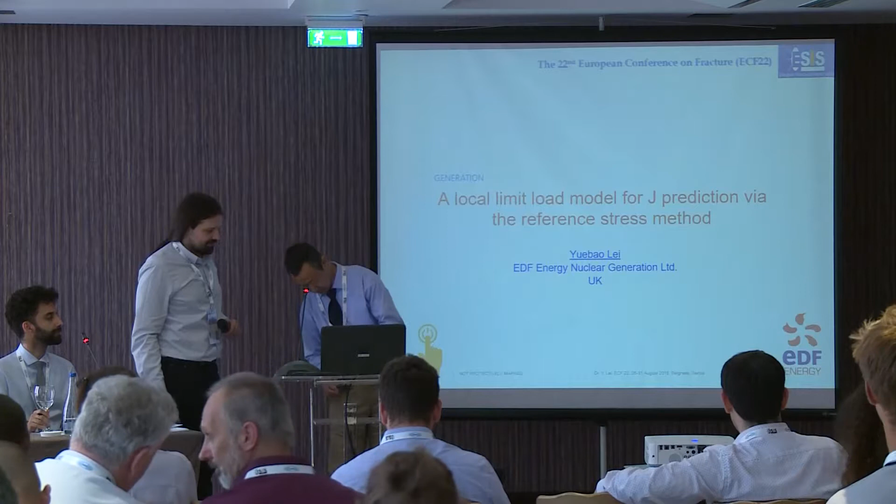Good afternoon, Chairman and ladies and gentlemen. My name is Yuebao Lei from EDF Energy UK. My topic for this presentation is a local limit load model for J prediction using the reference stress method.

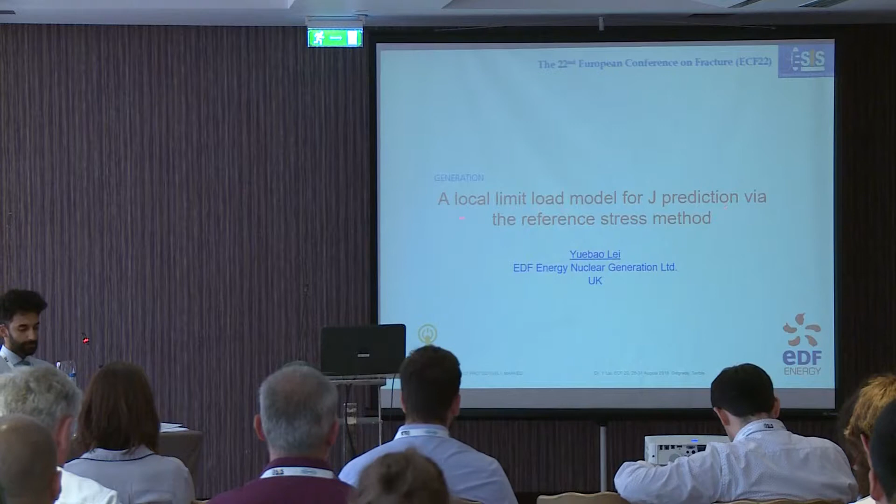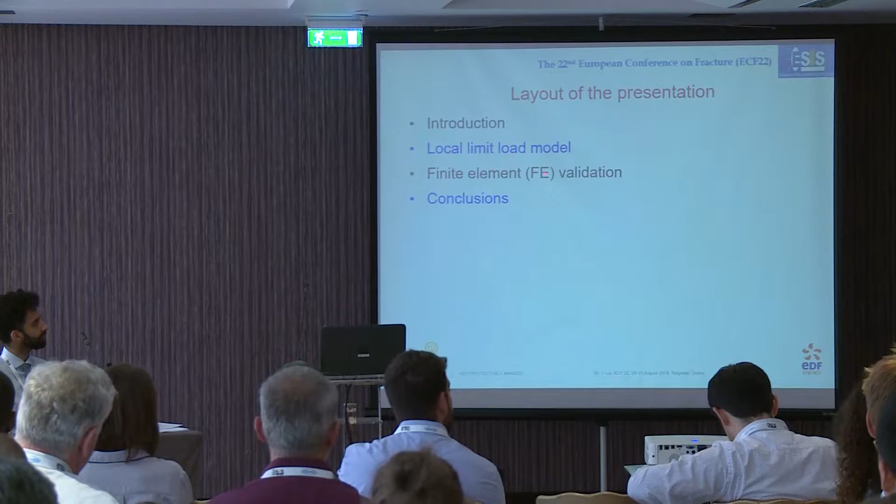First, I'll give an introduction, trying to give the relationship between structure integrity assessment, J prediction, and limit load. Then I'll answer the question why we have done that, give the local limit load model, show some finite element validation, and then conclude.

EDF Energy is the UK's largest electricity generator. Our nuclear power generation generates about 20% of the electricity for England, Scotland, and Wales. We operate 15 reactors, with 14 advanced gas-cooled reactors, that's very high temperature, and 1 PWR. This is quite normal as others.

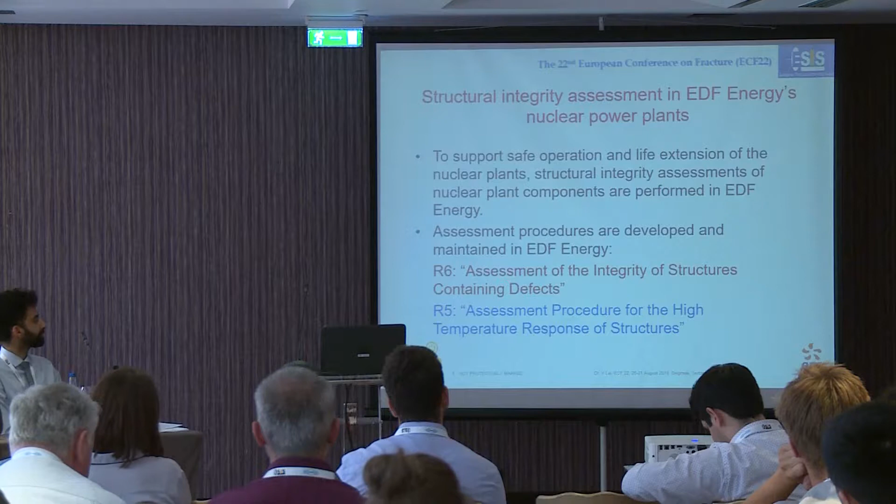EDF Energy performs structure integrity assessment to support our power station's safe operation and life extension of the plant. For this reason, we develop and maintain structure assessment procedures. One, I believe, is very famous, R6, the assessment of the integrity of structures containing defects. Another one is for high temperature assessment procedure for high temperature response of structure. The limit load I'm talking about relates to these procedures, but today I only talk about R6, not the high temperature measure.

In R6 fracture assessment, we use the failure assessment diagram method, FAD. This FAD is J based. In this assessment, we need an assessment curve and to define two parameters, KR and LR.

Another one is LR. This is the primary load applied, divided by the limit load corresponding to that.

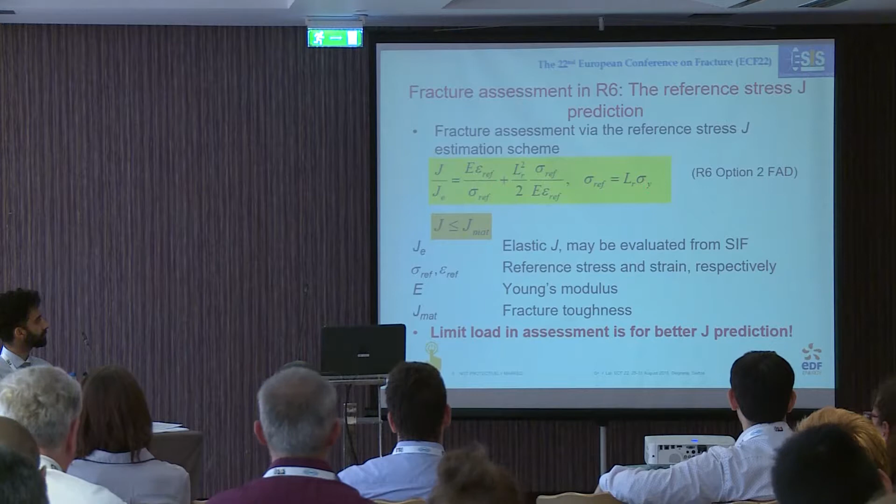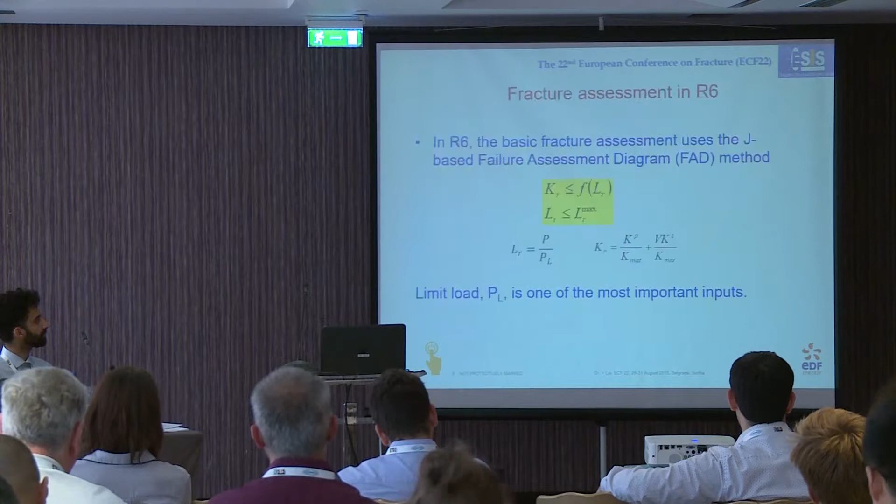Then LR is the same as we just saw, divided by LR equals the reference stress over sigma Y. That's exactly the same as this one, just produced in a different way. This is another, more general way to show the reference stress method behind R6.

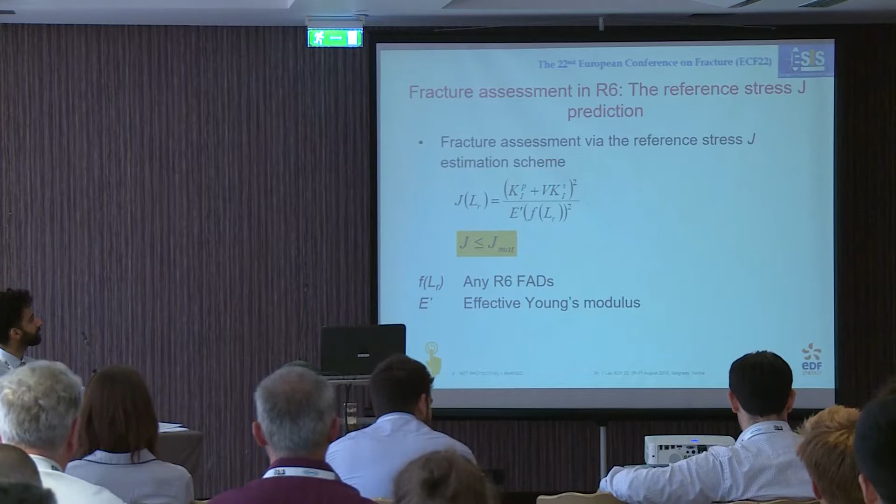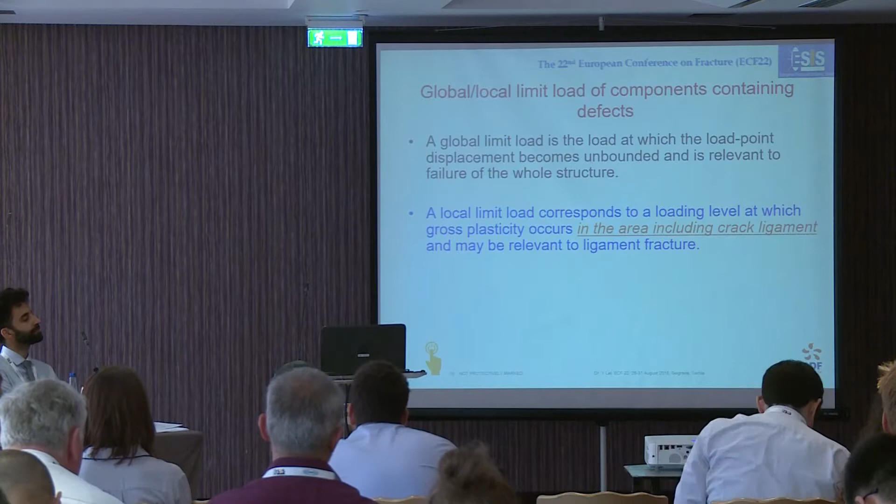I'm not going to talk about that now, but we know the limit load is a very important parameter affecting your fracture assessment. Many people think limit load is about plastic collapse, but in R6 fracture assessment, limit load is a parameter primarily used to more accurately and conservatively predict J growth, rather than plastic collapse. Many references talk about reference load rather than limit load, but I'd rather use limit load because reference load normally gives you one solution, but limit load we have many solutions to use.

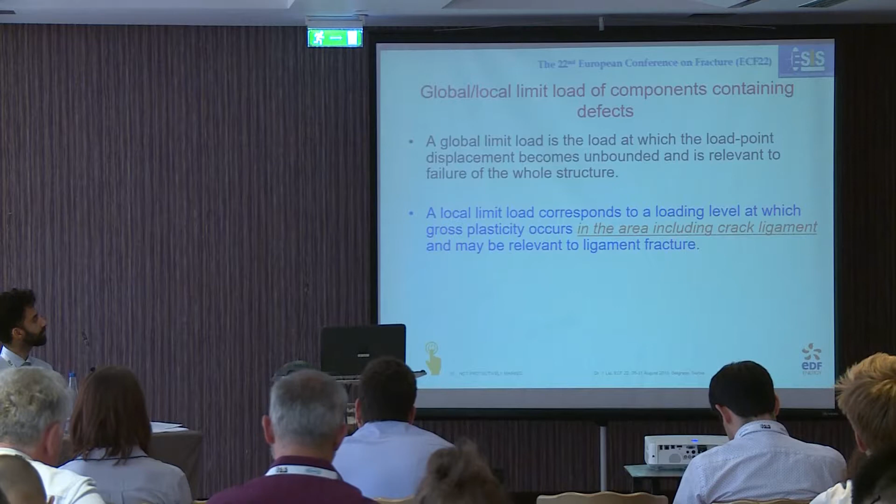For limit load used in R6, we have global limit load or local limit load. The global limit load is a load level corresponding to the load line displacement becoming unbounded. The local limit load only considers yielding, not plastic collapse, around the defect.

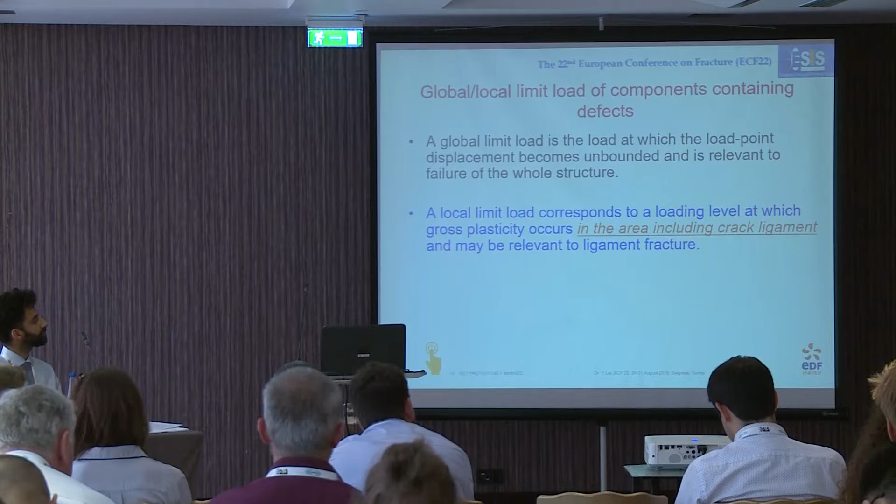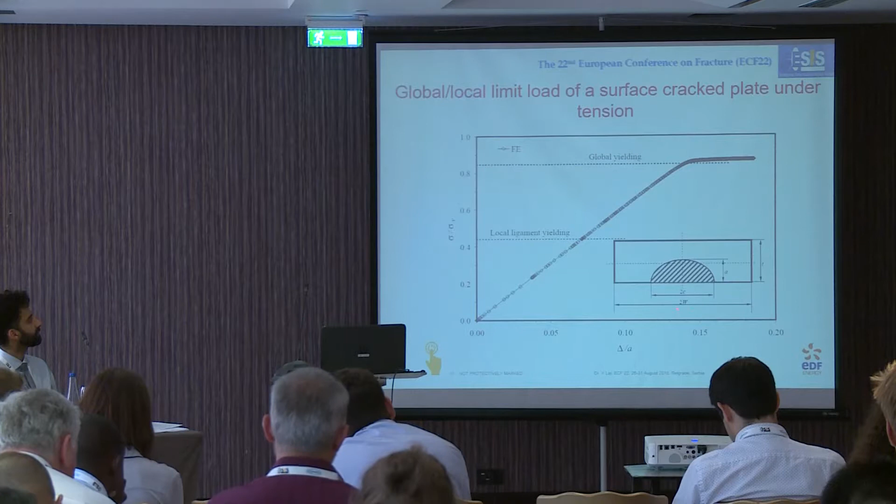So when in assessment, we need to provide limit load solutions to users. For simple geometries, it's quite easy to create global limit load solutions - we have some solutions in R6. But for very complex structures, providing global limit load solutions is almost impossible.

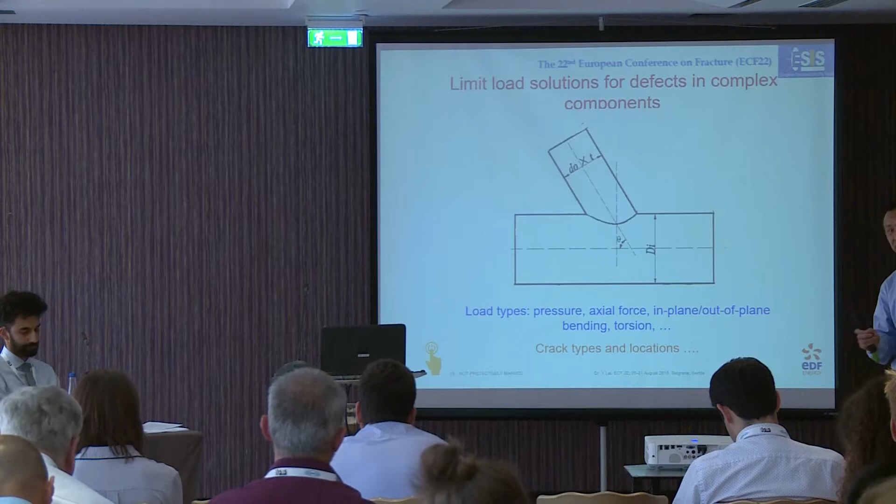So for this case, the developed local limit load solution will be a good solution, because we only consider stress information locally at the crack location, without load types. But for this case, we need elastic-plastic FE J to validate the method.

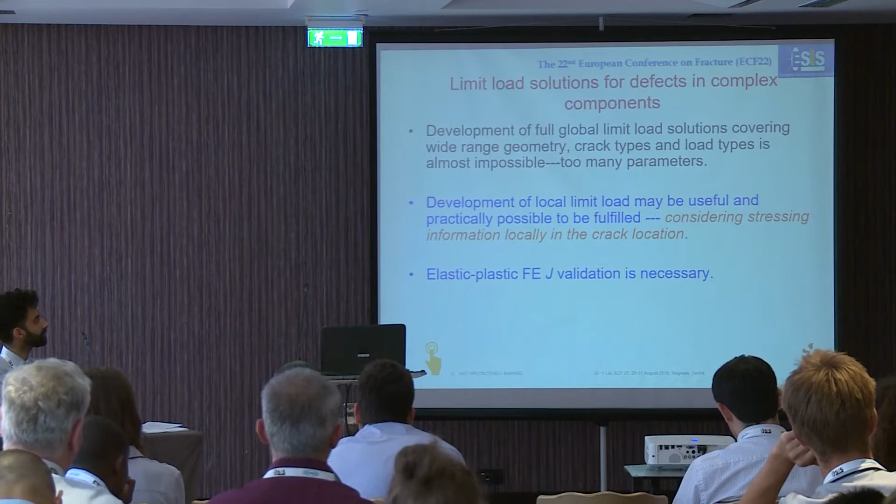So the aim of this work is to develop a local limit load model for local limit load calculations used in structural integrity assessment, and also create guidance in R6 section 2.4 for people to use, how to use it.

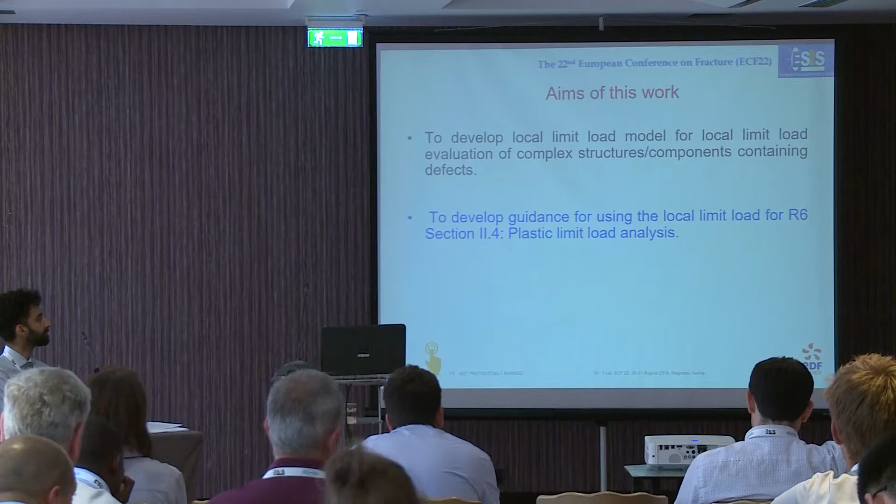Now we know the limit load and the geometrical relationship. So the next step is very easy. I describe the local limit load model I gave. My model is like that.

If you have a surface crack of depth A and length C at any location, then you create a plate with a crack size - a rectangular crack surrounding this crack. This plate has thickness the same as the real structure, but the length is just artificial, quite long, not the same as the geometry of the local structure.

Then you need to define the width. The width is defined based on C, the crack length - this is very different from other solutions, they use T. It's also weakly related to a over T, the crack depth, and K is a geometry factor that can be calibrated and recommended.

Then you need to do elastic stress analysis, uncracked analysis, to determine the stress state at this point. So what do you need to do? Check the membrane stress and bending stress, then the parallel stress - parallel to the crack - so you have a membrane stress 2m, sigma 2m, and maybe some shear stress.

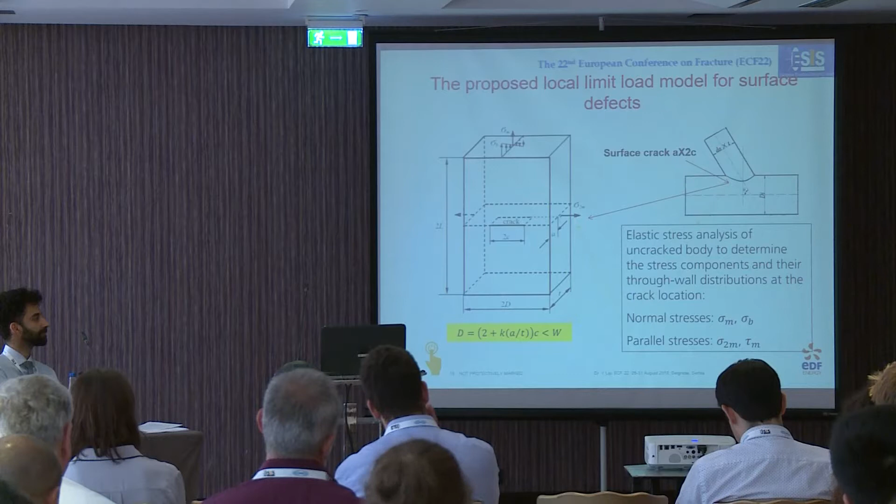Then you ask how to calculate the limit load for this plate. Without shear stress, we can calculate the reference stress - here reference stress and limit load are the same thing. So for convenience, we represent reference stress.

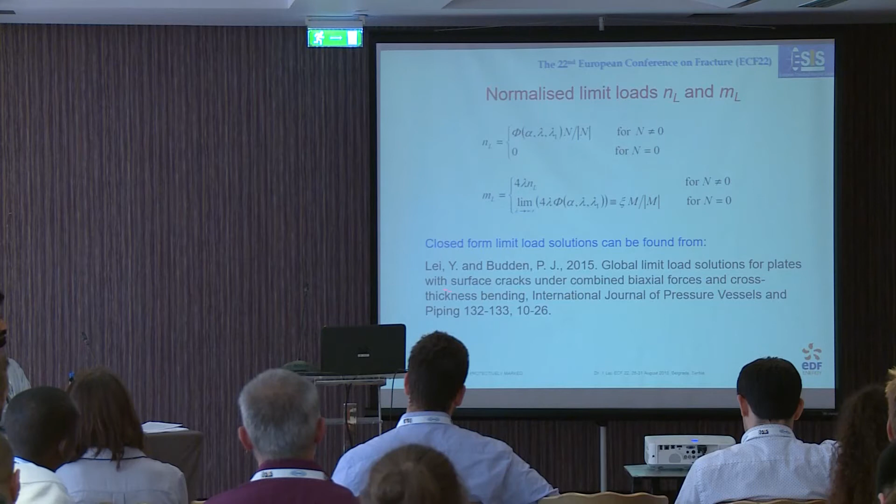So think about sigma ref - n_L is normalized limit load for tension. This has been developed and published in this paper, so it's an available solution - we just use that solution here.

If you have a shear stress, then you can correct the shear stress into this total. Then use this sigma ref to define the L_r, which can then be used in assessment. This is the full story.

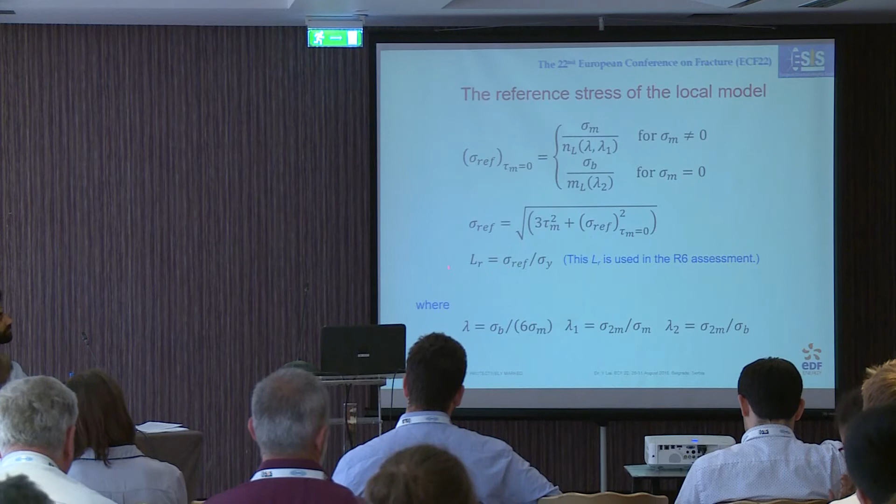But not quite - this is defined from the global limit load of a plate, but it's used as the local limit load of the structure.

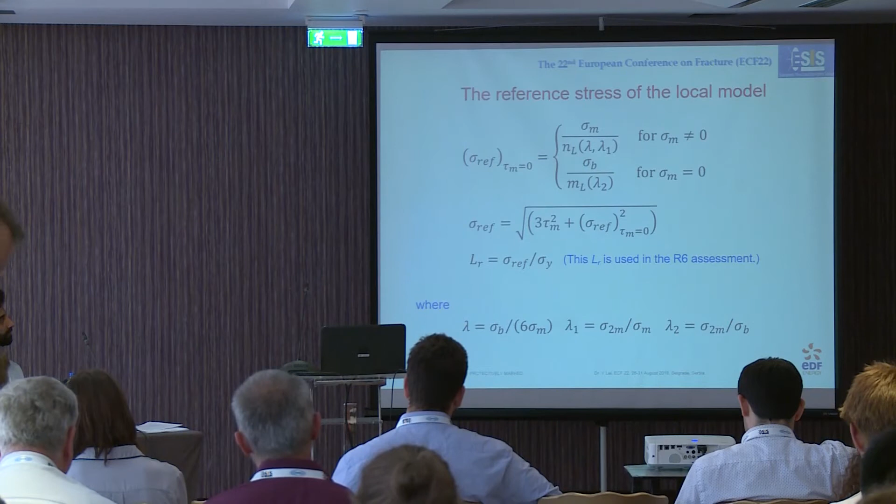Now let's show some finite element validation. Because our aim is to predict J, we use finite element J results, then use this local limit load reference stress to predict J. We compare this predicted J with FE J. The idea is very simple - just compare to see if you are conservative, and how much conservatism there is.

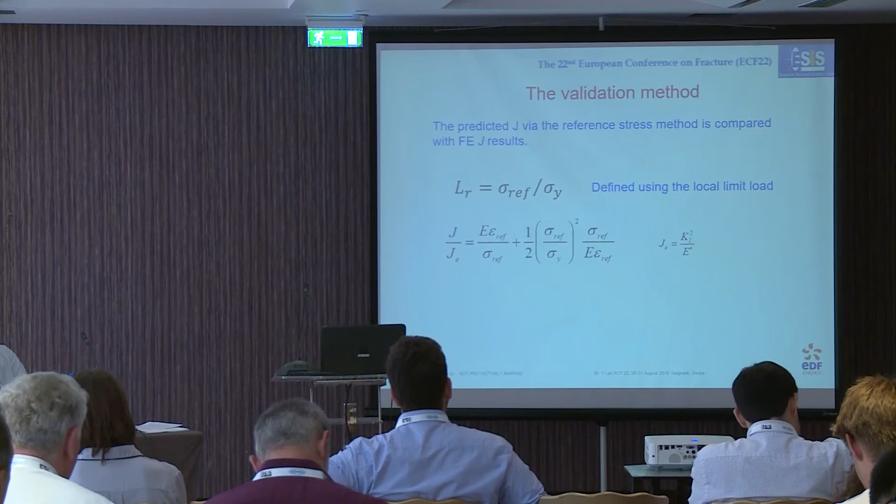I collected about 273 cases for plates with semi-elliptical cracks.

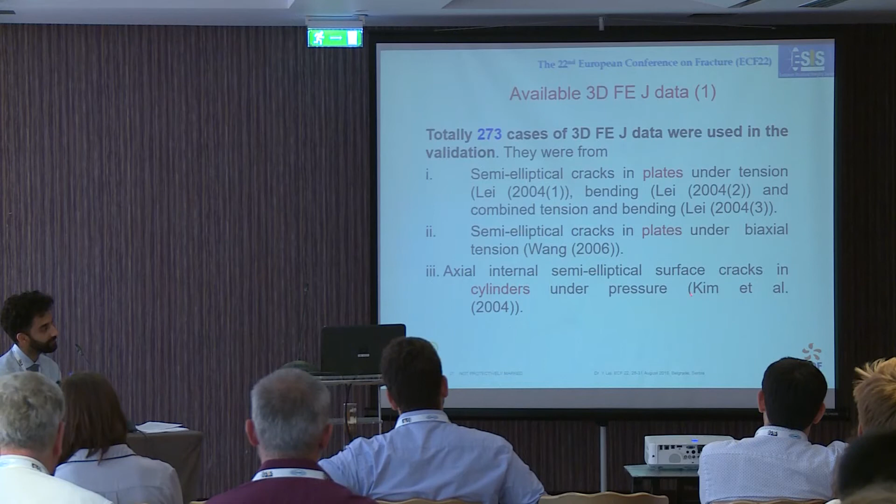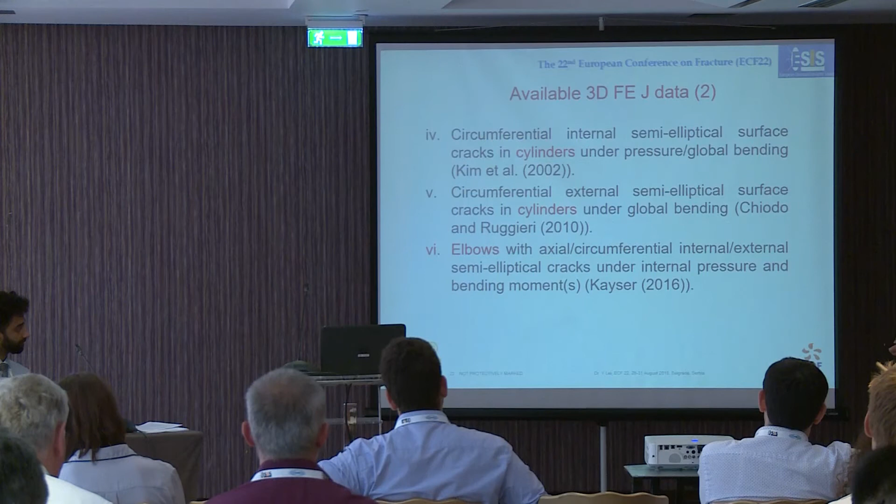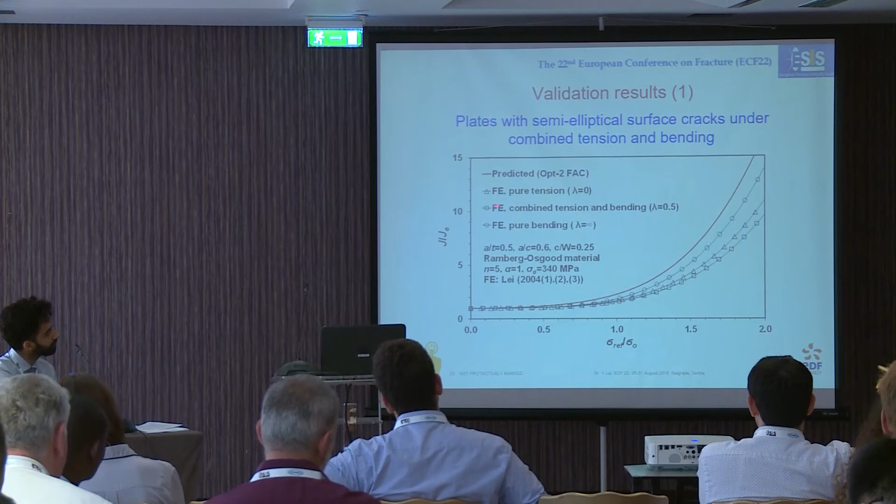This is the prediction, the red curve, and this is FE data. So for this case - pure tension, pure bending, combined tension bending - all conservative. More cases, biaxial load, you see.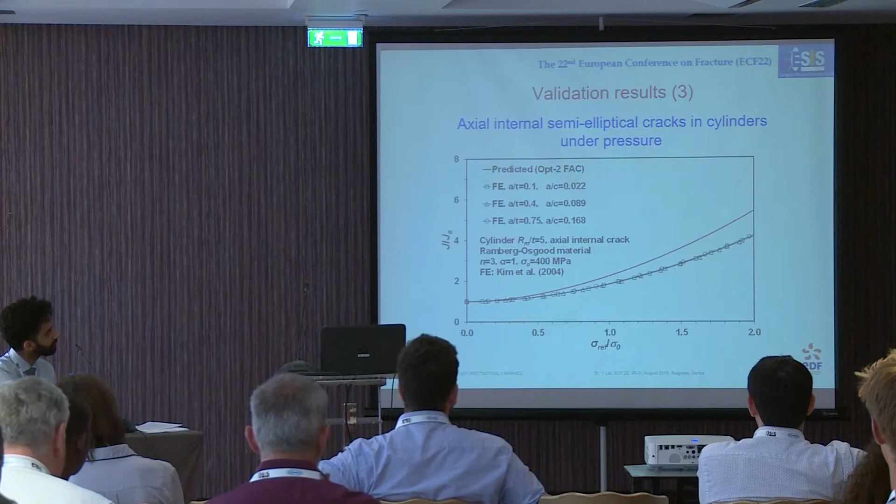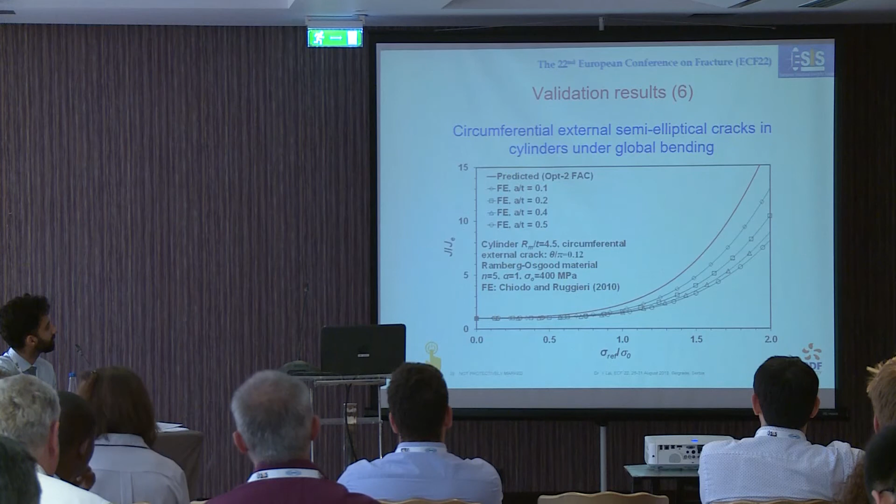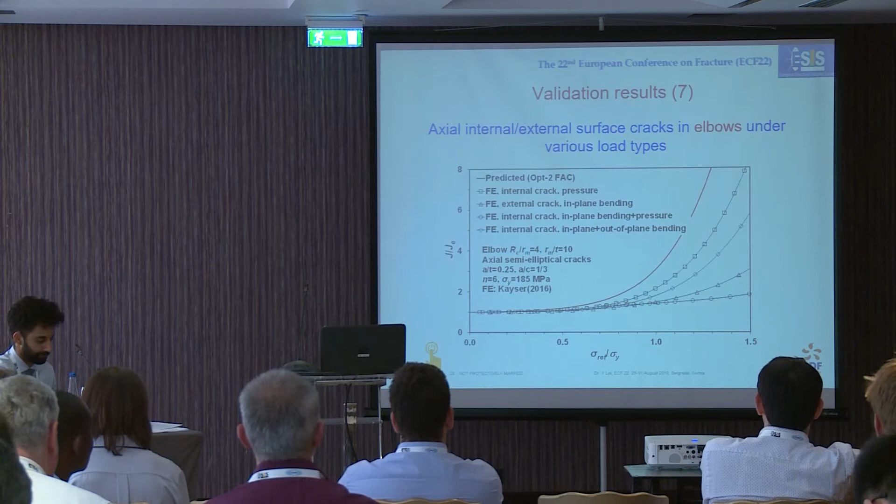And this is for cylinder with axial defect. This cylinder with internal semi-elliptical crack under pressure, that's the circumferential crack, the circumferential crack under bending, with external crack bending. Finally, that's the elbows - elbows for axial defect, and this for the circumferential crack.

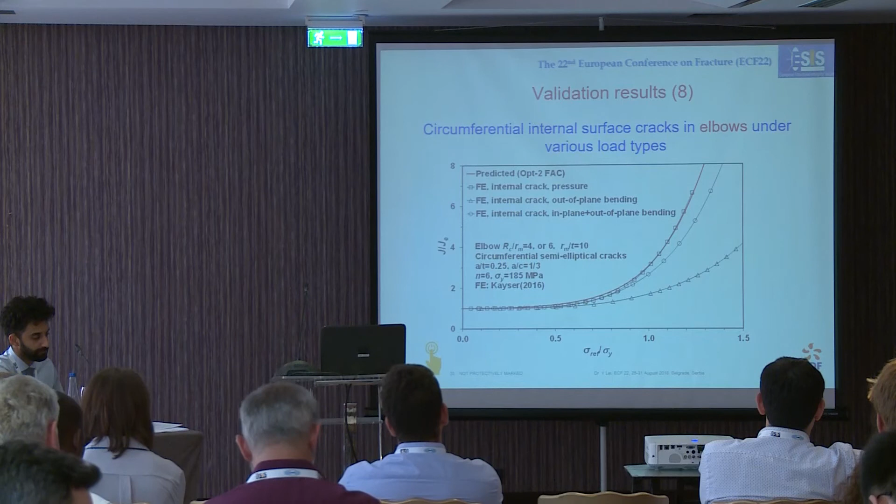So all give very conservative results. Some of them are not very conservative, just because of the assumption of stress - you only consider maximum stress, and for the bending case the stress does not change a lot. That's the reason.

Okay, now conclusions. First, we developed a new local limit load solution to estimate local limit load for use in structural integrity assessment. This method has been validated using available FE results, showing conservatism, but we still need further validation.

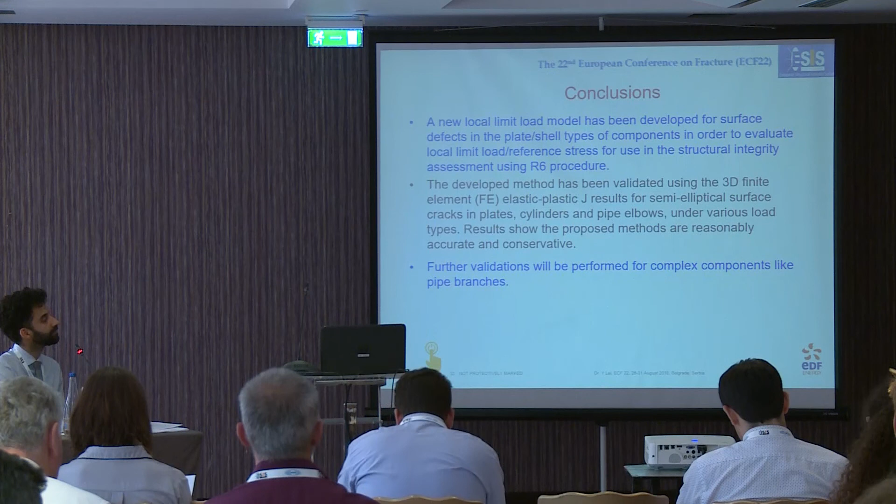Using very complex FE results, because our aim is to assess complex structures, not simple plates and pipes. Okay, that's it, thank you very much for your attention.